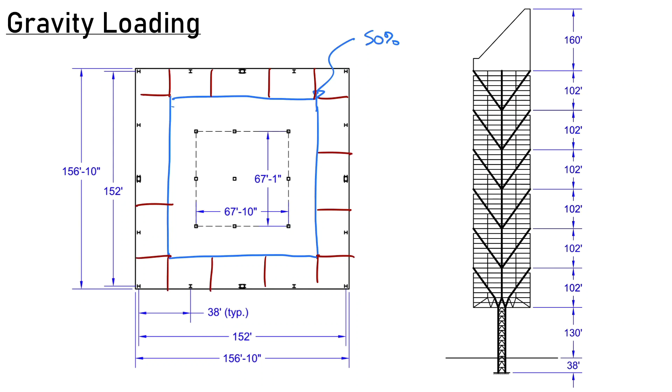You'll notice there are 16 columns around the perimeter, with 2 different classifications. We can have a corner column—if we check the area for that, it's about 1/56th of the total floor area carried by that corner. And all the side columns—3 for each side, 2 secondary columns, and the main trunk of our tree—will carry 1/28th of my total loading.

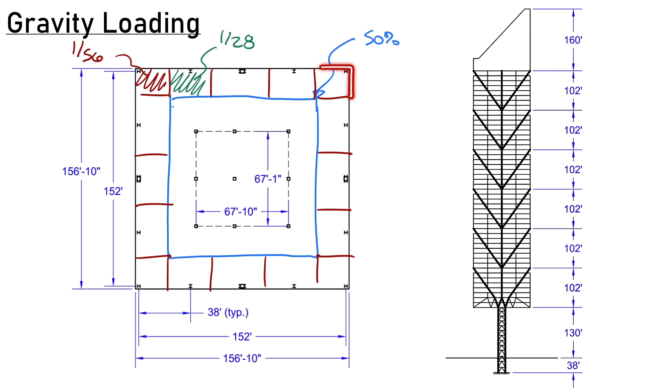In addition to the floor load, my exterior columns that are part of my exoskeleton will also carry cladding—that's essentially the wall on the exterior part of the building. We'll notice that because there are 16 columns, all of them will carry an equal amount of cladding around the structure. Now let's go ahead and calculate some of our loads.

I'm going to start with some of the corner loads here, acting on these corners of the building all the way down. We'll start with the floor load—I've assumed a load of 60 pounds per square foot. That accounts for all the structural steel, the decking, the concrete, the acoustical tile, and everything else like that.

So if we check Diane Hartley's thesis, she actually calculated this to be 61 pounds per square foot, and I'm going to round that off to a nice 60 pounds per square foot. So that's where that number's coming from.

Now we need to find the area that's carried by each of these corner loads. Well, that's 1/56th of my floor area. Each floor has an area of 24,600 square feet, that's a lot of square footage. And we're going to need to multiply it by 8 stories because each of these stacks has 8 stories in it. So my total square footage is 3,514 square feet. Multiplying that by 60 pounds per square foot, we find that this is 211 kips.

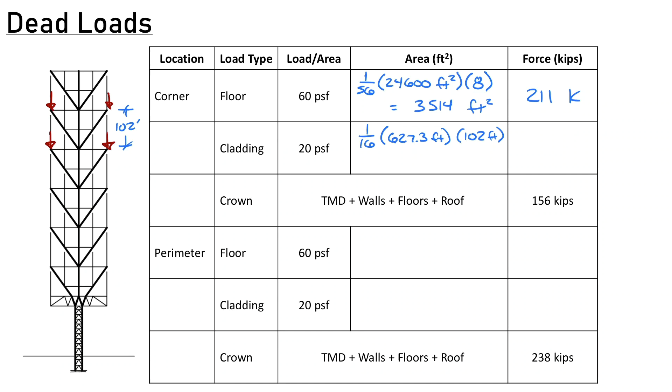We can do the same thing for the cladding, only all of my columns on the exterior carry 1/16th of my building perimeter. So my building perimeter is 627.3 feet. And then I need to multiply that by the height. This height right here is going to be 102 feet for each stack. So I have 102 feet times the perimeter, that gets me an area of my wall. And then 1/16th of that goes into my corner. So this is a square 4,000 square feet, which works out to be 80 kips. And that number is being multiplied by 20 PSF in this case, which again is an average number for typical aluminum and glass cladding for this kind of building.

You'll notice there's some more corner loads here for the crown. Those are the loads coming in from the top right here. Rather than waste your time with this, that includes the tuned mass damper, the walls up there, there's floors up there, there's a roof system up there, there's a whole bunch of stuff going on up there. But it all works pretty much the same way, and so we found that to be 156 kips of load on each of the corners.

Now we can repeat this for the perimeter. So on the perimeter columns, that's going to be 3 here, and let me move that slightly. So these ones are going to frame in right there, and we'll also have one here, here, and so on. So each of those represents an 8-story stack of loads from the perimeter. So the perimeter area is 1/28th of my floor, and so that's the same 24,600 square feet times 8 stories. This is obviously twice what we had for the corner, so that's 7,028 square feet. Multiplying that out by the 60 PSF, we find that this is 422 kips.

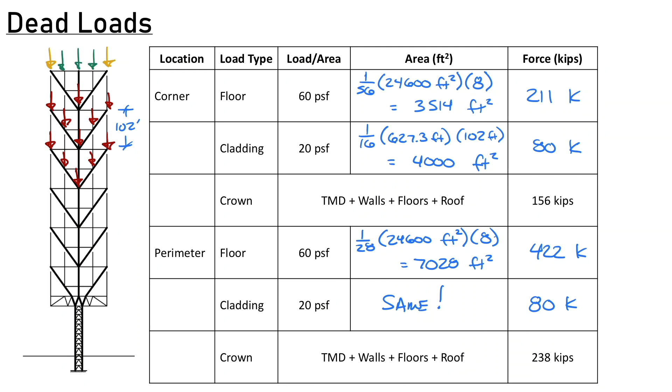And lastly, the cladding, I'm not going to repeat myself, they are the same. All columns carry 1/16th of the load, so this is also going to be 80 kips right here. Lastly, we do have some crown loads here, here, and here along the perimeter. And that, once again, includes my tuned mass damper and other things within the crown of the building, which adds up to 238 kips. So combining loads, I want to consider a typical chevron example.

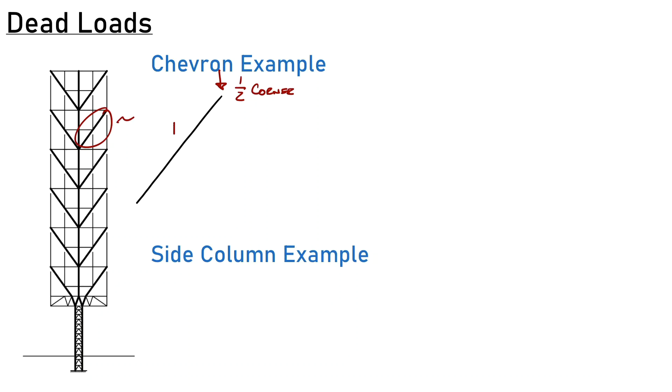So we'll just pull out this chevron right here, and we'll draw it scaled up just a little bit. And so this is going to carry a corner load, and really it's half of a corner load, because the other half of that corner load is going to go down the other side of my building down here. And then we'll also have a perimeter load framing in right here.

Now, this at the base is going to be supported by my reaction right down here. And so if I want to analyze what the axial force in this brace is, first I need to find its angle. So once again, the engineers were really thinking to make our life easy for this. This actually makes a 3, 4, 5 triangle. So this is 3, 4, 5 in terms of the ratio, which means the vertical component is 4/5 or 0.8 of the total load.

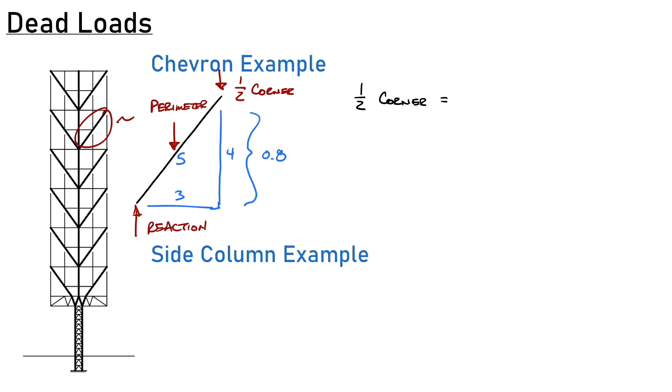So therefore, if I want to do equilibrium at the top here, I want to make sure my forces balance in the vertical direction. I'm going to have 1/2 of a corner load equal to 0.8 of my brace load. And I'm going to call that the top part of my brace, because as we'll notice, my brace is going to immediately get more load in the bottom part.

So we can go ahead and solve that. If I want to find my brace top, it's going to be half of the corner load, which is 292 kips from what we found before. We divide that by 0.8, and we find that this is 182 kips. So that's the demand in the top part of my brace.

Moving down to the lower part of my brace, we're now accumulating an additional perimeter load, so the lower part carries a higher amount of gravity load. All the angles work out to be the same, so our brace on the bottom is going to be the perimeter load, which was 502 kips. We divide that by the same 0.8 factor, and add that to the load above it, which was 182 kips. So in the bottom of this brace, I carry 809 kips. We get a pretty big increase in the axial load as we go down this brace.

Now, what's cool about this building is that other than the top one, which carries crown loads, every single brace is exactly the same in terms of gravity loading. So they all carry one perimeter load and half of a corner load. Where the load is going to accumulate is down our central column.

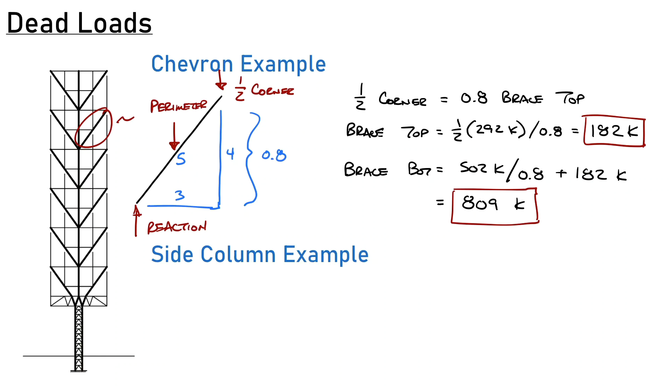Let's take an example. Let's look at this point right in our central column, and calculate all the loads that get added up to accumulate into that point. We have these corner loads from the crown, and 3 perimeter loads from a crown. I'll note also the corner loads - only half of them go to this side of the building because the other half goes to the other side. Then we accumulate a whole lot of perimeter loads here, there, there, there, there, there, there, and there. Plus there's 2 half perimeter loads up at the top, so each of these is 0.5 apiece.

Lastly, we're going to have some corner loads - 1, 2, 3, 4 corner loads. All of that force is getting accumulated right here. So therefore, we have 5,464 kips. That can get really large - that's 5 million pounds already, and I'm only about halfway down my building.

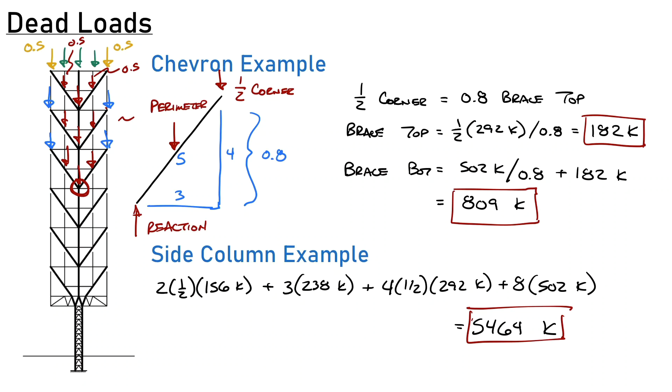So if we want to wrap all this up, all the box numbers here are my chevrons, and they all carry the same load going down, carrying a small gravity load at the top and a big gravity load at the bottom. The loads here on the side are my column loads, and you can see as they increase going down the structure until I get about 12 million pounds of load at the base of each of these columns. Now, this is the dead load only, so I'm only looking at self-weight.

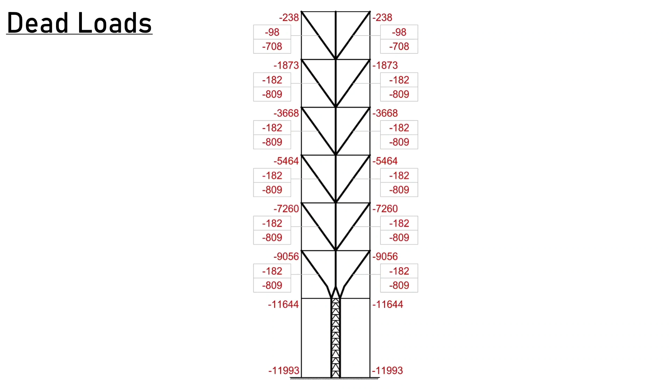You can do similar exercises for the live load. I'm not going to get into that here. It looks pretty much the same. It's an office building, so you could probably assume about 50 pounds per square foot live load everywhere, and you don't have to worry about cladding because generally speaking, we don't have live loads on the cladding.

Now that we have a grasp of our gravity loads, let's take a look at the lateral loads on this building. Let's say I have wind load coming in from this direction. That's going to move all of my stories that way, which means this side is going to have to get shorter - it's going to get compressed - and this side is going to have to get longer, which puts it into tension. So let's focus on this compression side. The same thing happens on the tension side, you just reverse the directions.

Right here, this brace is going to put a force on the joint. By being compressed, it's pushing back on it, so it's going to push up and to the right. Now, to the right is fine because I have a beam right here that can pull back to the left. However, up is a bit of a challenge, because normally that would be countered by a column pulling down on my structure. However, I don't have that, meaning that upward force has to get countered by a downward force from this brace right here. A downward force means this brace is pulling, which means tension. So this side is going to be in tension, and this side is going to be in compression.

I'm going to have a set of compression braces going down and a set of tension braces also going down, so now all of my braces are engaged in this system. You'll notice that the tension and compression here kind of balance out, so there's not going to be any force that gets transferred down from that. However, on the sides, I have two tensions right here, which has to resolve in a force that gets transferred down this column, like a gravity load, and that accumulates over the entire building.

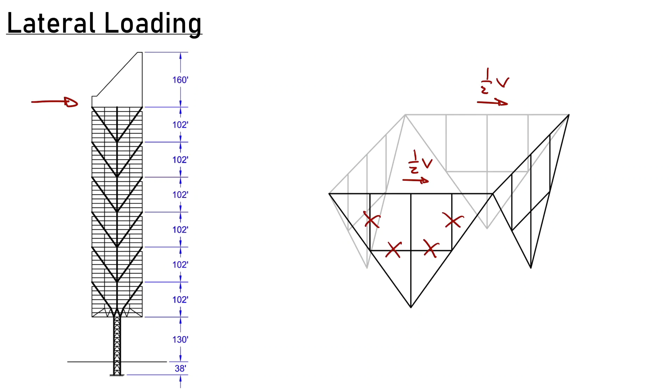So let's simplify it as such. Once again, we have half the building shear on each side. The building shear is the total accumulated load above some stories, so if I'm looking at this set of bracing right here, the shear is all the load that's accumulated from above that.

We're also going to have an overturning moment associated with this building, because essentially the building acts as a cantilever, fixed at the base, and therefore we get a moment that's trying to force this thing over. I'll draw that a little bit later, but let's keep that one in mind.

Now let's draw how the structure is going to deform in tension and compression. We've seen before that this side and this side are going to be in compression, so I'm going to make my compression red here. Anything that's red is in compression. We also saw that this side is getting essentially forced down right here.

Now if I look at tension, we have to balance out our compression braces on the sides, and this entire side on the left is also in tension. This now satisfies our equilibrium.

So if we look at, for example, this joint right here, we're going to pull on that joint with this brace, and push on it with that one. That push and pull, to make sure our forces balance out in the vertical direction, must be equal to each other.

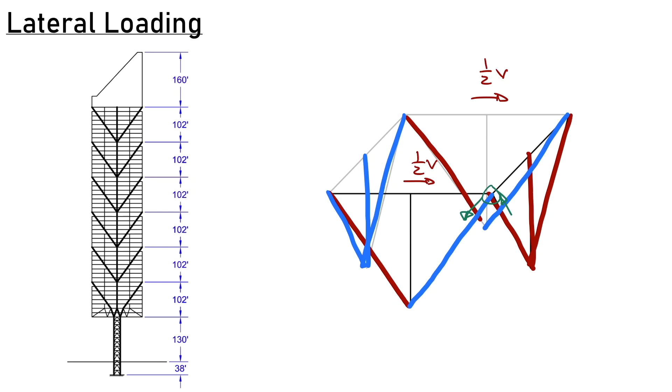So now what I want to do is find out how much force goes to each set of braces. These two braces right here are going to be carrying half of V. If we go back to our triangle for these braces, it was that 3-4-5 triangle again, so my horizontal component for the brace force is a 0.6 factor. Therefore, we can consider a sum of forces in the horizontal direction for those braces: half of my shear has to equal two braces multiplied by the horizontal component, 0.6 times my brace force, which I'll call B here. Solving for B, we find that B equals my shear divided by 2.4.

Now, as we discussed before, this component and this component have to be the same, because we have to ensure that our sum of forces in the vertical direction always balances out at each of these corners. Therefore, this brace force B is actually carried by all 8 braces.

Now we also have compression and tension in these corner columns that I mentioned, and the reason that happens is because I need to have reaction forces here in my free body diagram. Obviously we're going to have horizontal reactions, occurring right here and here because that's where the brace forces frame into it. But there's going to be a net compression here, so I need to hold that up, and a net tension here, so I need to pull that down.

And what's going to happen with that is we need to be able to calculate an overturning moment on the building to find those forces. So the distance between those two forces is 152 feet.

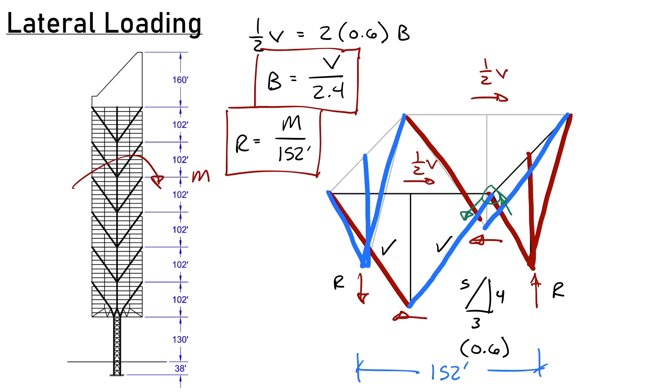Here's our building. It behaves like a cantilever again, and I'm going to put a distributed load on this thing, so we'll have load going all the way down. I'm not going to put load on the leg here. There is going to be some, but it's going to be pretty minor.

This distributed load, we're going to say is uniform just to keep our analysis easy, and let's say it's 35 pounds per square foot. That number is coming from the New York Building Code at the time, which specifies 35 pounds per square foot as the maximum wind load on this building. That wind load would be smaller as you go down the building, but we're going to overestimate it a bit since I'm also not accounting for the load down here.

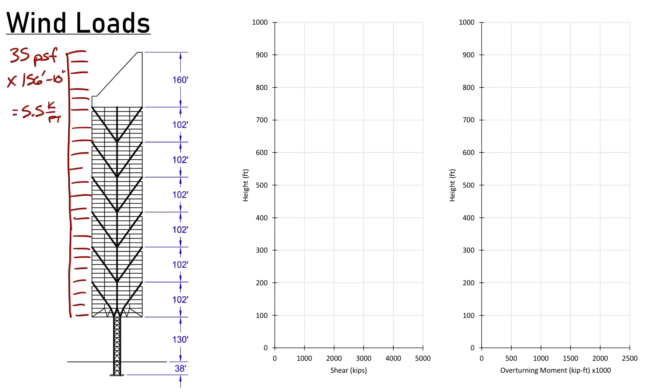We can multiply that 35 pounds per square foot times the side length of the building, which is 156 feet and 10 inches, to find that this is 5.5 kips per foot. So therefore we need to do a shear and moment diagram for this thing.

The shear diagram is going to look like this: it varies linearly going down the building, and we get to about here where it transitions and just goes straight down, because at this point I'm assuming there's no load. The moment diagram is the area under the shear diagram curve, which means it's going to be parabolic, taking a shape like this and peaking out somewhere like that. This rapidly grows in magnitude as I go down the structure.

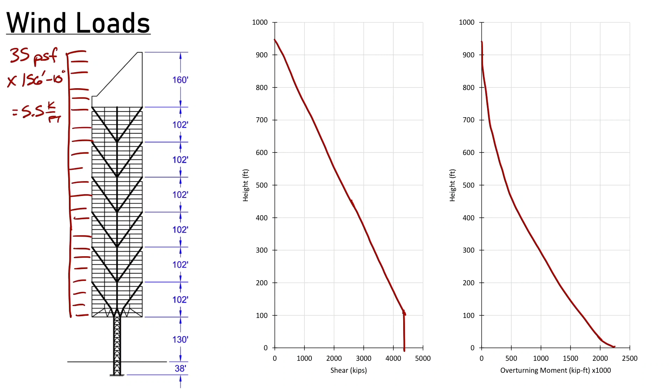If I have a shear at each level, I can take that shear, and we know that my brace force B was V divided by 2.4, which gets my brace forces. I have compression side braces and tension side braces going down my building, so obviously the lowest braces are carrying the biggest force in this case.

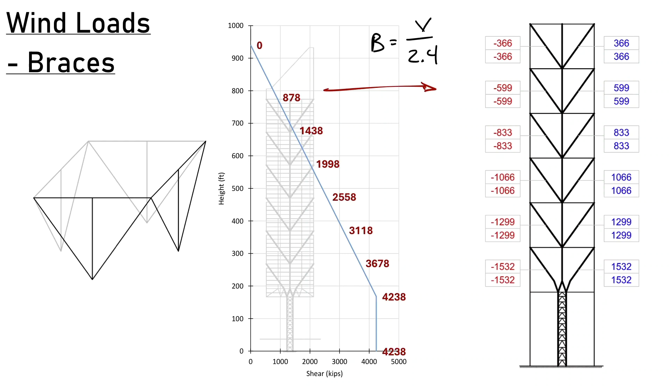If I look at the overturning moment, let's add on to that. Now I'm tacking on my column loads, which are these numbers right here going down. Those column loads are going to be, my reaction R is M divided by 152 feet.

You may notice this looks kind of small, but it's multiplied by 1,000 here to make sure it all works out, because otherwise we have 2,348,000 kip-feet for an overturning moment at the base. So it's a huge moment.

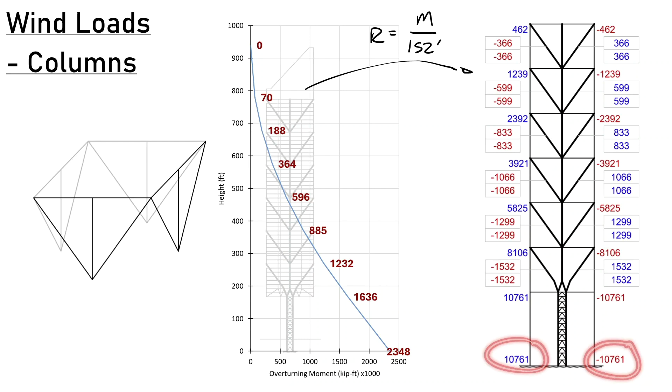The other thing we'll notice is we're getting pretty big axial forces down here at the bottom. If we compare this in terms of our combinations of dead and wind load, the dead load was about 12,000 kips at the base of the building, and our wind load is also causing about 11,000 kips of axial force in our base column. It's a huge amount of load, and it ends up canceling out almost all of my dead load in the column taking the wind load.

The other thing we'll notice is that as I go down my building, my forces on the chevrons get bigger from wind, but again it stayed the same going down the building for dead load. So again, these are getting more and more load as I go down that building.

This represents what would have essentially been the design for the building. This was sort of our load combination that we'd have. We didn't worry about any other types of wind load, hint hint, getting into that diagonal or quartering wind case. So we would design our braces for these tension forces here, and compression forces on this side, and then our columns would be able to carry this largest compressive load right here.

Now, these braces are actually multi-part systems, so they're about 120 feet long, and they were spliced along their length. That's a lot of the times what the bolts are for. There are going to be bolts along this length to keep those braces intact.

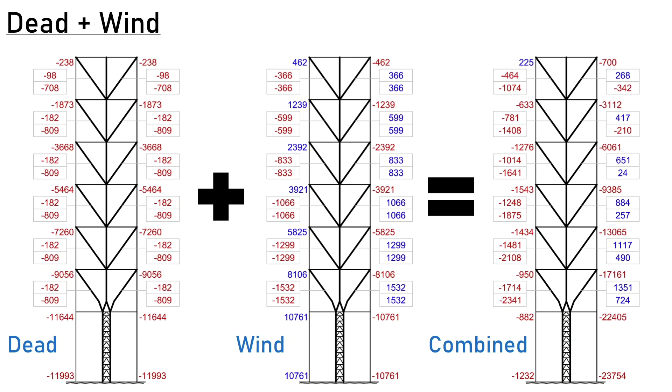However, what happens if we increase the wind load? So that's what we're going to do here. We're going to consider the diagonal wind case. Let's look at this now, with a top-down view of my building.

If I'm looking at a diagonal wind case here, we'll call our wind load W. There's a couple different ways of breaking this down into components. Probably what was done at the time, although this is somewhat uncertain, is that we break it into a triangle. So I'm not changing my total wind load, but I'm applying, for example, square root of 2 over 2 in this direction, square root of 2 over 2 in this direction. I'll round that off to 0.7 wind in each direction. Modern wind design uses 0.75 wind in each direction, but let's go with 0.7 for now, since that's likely what would have been done at the time.

So if we look at each direction individually, let's look at this wind load going into the page here. We'll have our compression and tension regions: compression, compression, and all this side is compression. Then tension, tension, and all of this side is tension.

Now if we look at wind in the other direction, this is the one we already looked at. We'll once again have compression, compression, and all this is compression. And we'll have tension, tension, and all three of these are going to be tension.

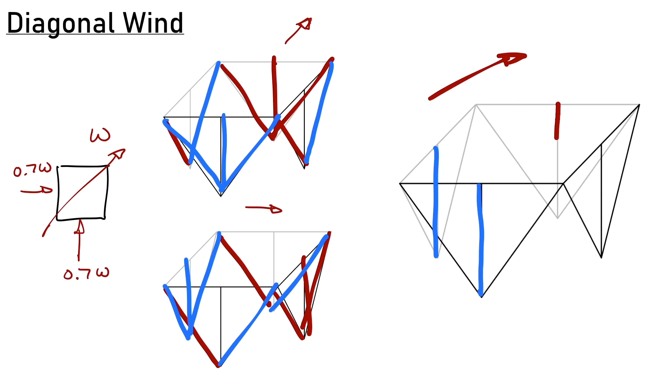So we're seeing, column-wise, this building is actually more efficient for the diagonal winds than it was for just the straight-on headwind. Now I've divided my column loads into two columns here rather than focusing it all into a single column. The load in these columns is also only going to be 70% of what it carried before.

However, if I look at the diagonals, my braces, things are going to be a little bit more tricky, because this is tension and it's also tension here. So those tensions add together: 0.7 plus 0.7 is 1.4 of tension right here. So this is now 1.4, and that's going to be problematic.

We'll notice the same thing happens in compression. So this is now compressive right there, and we'll get compression on this back one as well, and then tension on this one right here. The other four—this one, for example—tension and compression cancel out. It's zero. There is no load on any of these, or this one in the back.

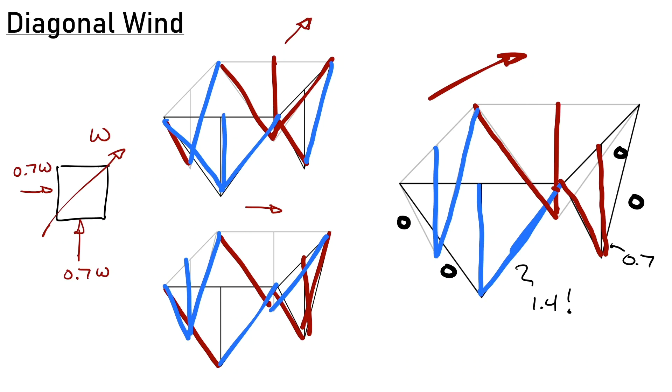So summarizing this change to the diagonal wind: if I have my orthogonal wind case on the left here, all these brace numbers get multiplied by 1.4. So 1.4 times my brace becomes my new number—more compression in these braces, more tension in these braces over here. Then looking at my column numbers, which we called R, those are all reduced—so it's 0.7 times my columns.

So now let's combine that with dead load. This is where things get interesting, because again we are adding and subtracting things that are pretty similar in magnitude. So if you make a small change in the wind, it can make a very big change in the resulting force. Here's our combinations from before with dead and wind, but now we're looking at it with the diagonal case on the right. And what we'll notice is there are a couple of these that have major problems.

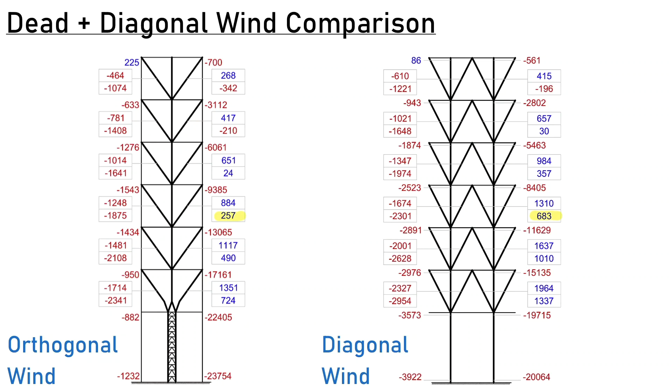So the infamous Floor 30 right here is about a 250% increase in demand. That's going to be major problematic if we designed that thing to carry 257 kips and now it carries 683 kips. Those splices in that brace are going to have a very bad time.

We'll notice other similarly large increases, always in the lower part of the brace. That's about a 200% increase within the second stack of braces. The upper parts of the brace tend to have less impact because they carry less gravity load. So from 1,117 to 1,637, that's still bad, but not quite as bad because I already designed that connection to carry a good amount of tension. It's carrying 500 kips more, but that's only about a 50% increase, so not quite as bad as what we're seeing there.

Column-wise, obviously we're doing better. My column loads went down with this diagonal wind as we were kind of expecting, but I'm going to have a number of braces here that are going to have major problems.

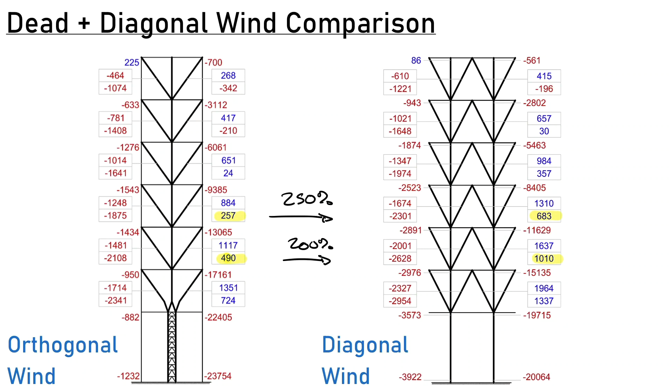The next thing we should consider is that right now we just added dead and wind straight together. In modern design, we have this thing called an overturning combination. If we look at LRFD design, we'd have a reduced dead load combined with our wind load. The purpose is to increase the moment on structures, or increase the likelihood of seeing when this stress changes sign—when it changes from compression to tension—so we're better at detecting and designing for that.

If we look at the ANSI A58 of the time, from 1972, we'll notice there is no reduction ever in a dead load—you don't really consider it. But there's a little caveat I love in the code, where they say: dead load counteracting live load—when loads other than dead counteract dead loads in a structural member or joint, and that's exactly what we have going on here with our braces, special care shall be exercised by the designer to ensure adequate safety for possible stress reversals. So what should we do about that? It doesn't really give us any guidance.

So what I'm going to do is adopt what happened in 1998 later on. There was an addition to the allowable stress design load combinations—we'll add it down here as combination 9—that was essentially 0.6 times dead plus wind. That seems like a ridiculously huge reduction in dead load. The purpose is a little more complicated than just reducing dead load, because it's also trying to increase the wind load effectively at the same time, but doing it with essentially one factor instead of two. That's why it's such a big reduction in dead load—nobody expects actually 60% of dead load, but that's what they've stated.

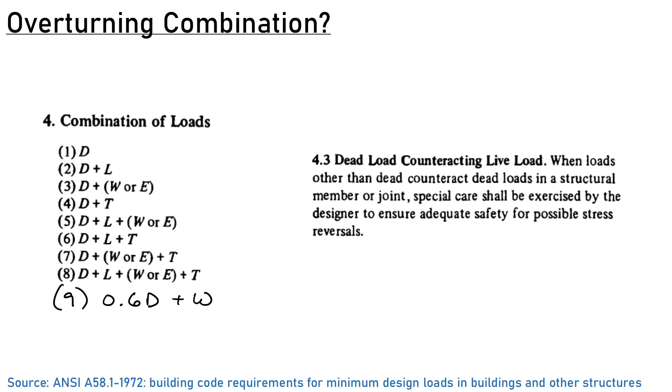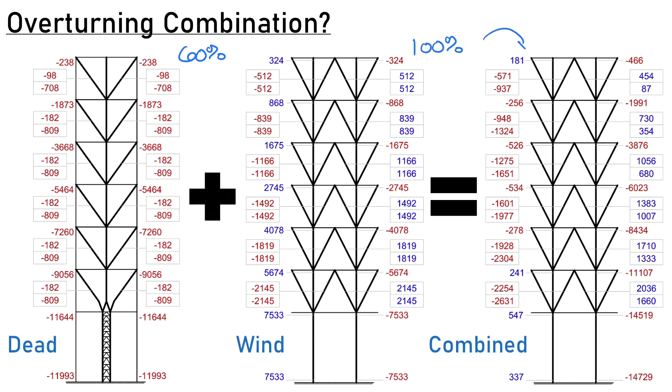So if we look at that load combination, what happens? Now we're looking at 60% of this plus 100% of this, which gets us a new combined load. On the next slide, I want to compare this to the original design.

Original design for this building—once again we'll look at the infamous Story 30 first. We designed it for 257 kips. Now it is four times as large, so it's now 1,000 kips of demand. There's absolutely no way that any connection designed for 257 kips is going to survive a 1,000 kip axial force in this case.

We'll notice there are also similarly large increases in the axial demands in the lower stories. This one looks like an outrageously huge increase as well. Chances are this one would have been designed for some nominal value—for example, a minimum design of 250 kips specified in the design plan. So even though you see a really low value, it was probably designed for something of about 250 kips, but that's still a very large increase of about 2.5 times.

Also of interest, we are actually going to start seeing uplift in the columns on this tension side where the wind is hitting. I don't know exactly how that was handled in terms of the design, so it's still doing okay so far—we'll assume that it is just fine.

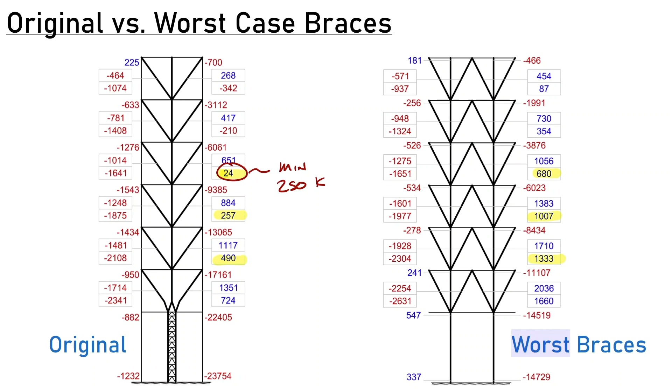And that's a wrap. So to make a long story short, yes, strengthening these braces was a very good idea. So thanks to LeMessurier for making that happen. I hope you learned something from this video. Have a great day, and I will see you next time.